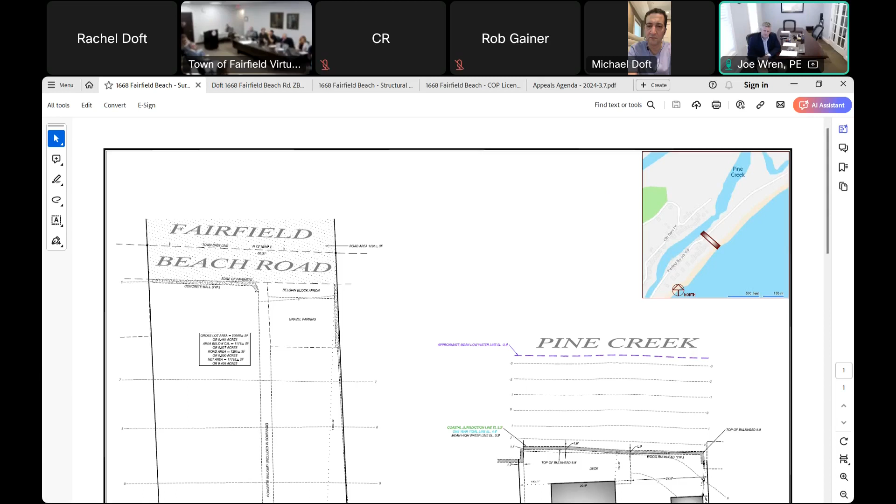Excellent. So this is the survey map that was prepared. Up in the upper right corner there's a location map. Everyone's familiar with Fairfield Beach Road and Pine Creek, this location is here. Similar to other properties on Fairfield Beach Road, there's the main house on the Long Island Sound side, which is number 1671. Nothing is being proposed or done on that side at all. On the opposite, north side of the road, house number 1668 is at this location. There's currently a deck and steps at the front, a gravel driveway, a small shed in this corner, an existing deck here with steps, and then a bulkhead similar to all the other properties along Pine Creek.

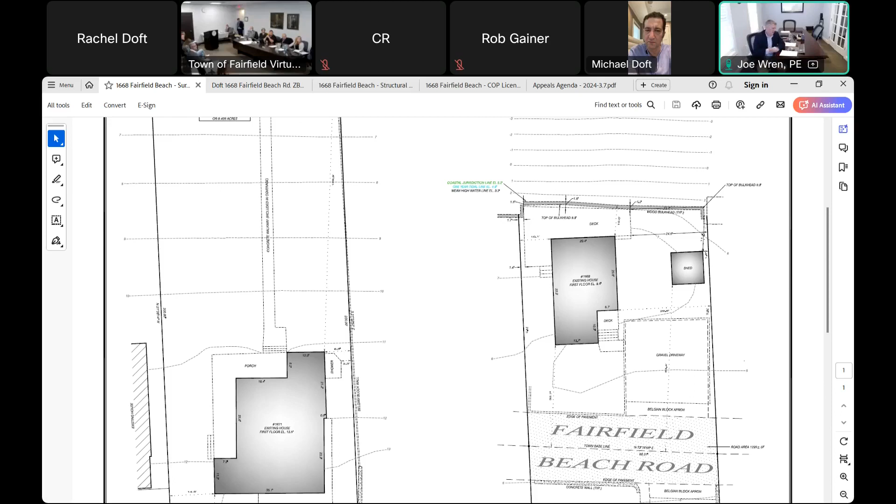In a nutshell, what we're proposing to do is to repair this bulkhead, and I'll show you photos momentarily. Currently, there is soil behind that bulkhead being lost through the deteriorating bulkhead, causing structural failure of this deck. We included pictures with the application, and I'll bring those up momentarily.

All the applicant is proposing to do is remove this deck, because they have to. In order to repair the bulkhead, they have to excavate behind it to replace the timbers. I'll show you those plans as well, and then rebuild the deck back to its existing dimensions, no differently. The steps, all the dimensions of the deck, step on the right side and a few steps on the left side, all of that will be put back.

So we're not technically increasing anything. Since we're removing this to repair it, we kind of have to treat it as a new structure, unfortunately. The structure was there for decades.

No one knows the exact date. We went back in some aerial photographs, which we included. The furthest we can go back with a clear image was 2006, which is now 18 years ago. But Rachel and her brother have recollection of the deck being there back to the 1970s when they were children, and remember being on the deck, but we just don't have any photographs of that. Regardless, it's been there for decades, and it's in existing non-conforming condition.

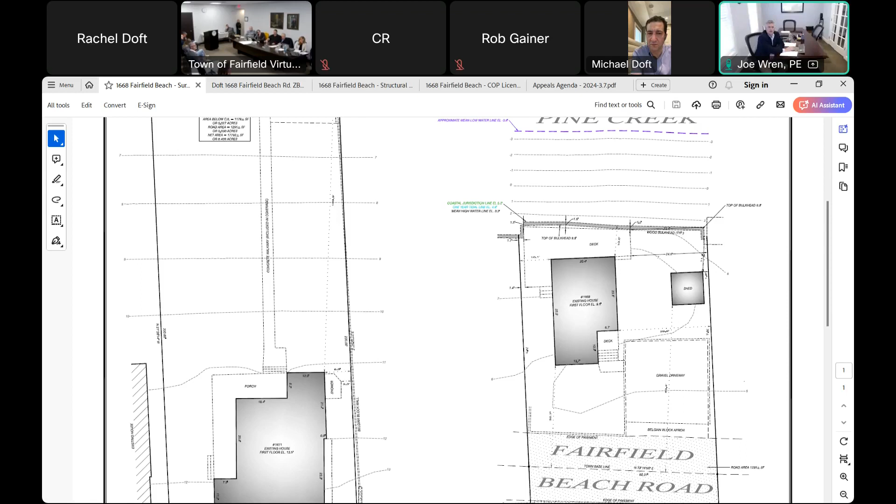With that, I would like to bounce to the application itself, where we provided the summaries and the narratives. Before I get into those, I would like to scroll down and get into the site photographs.

So starting with this photograph, I can rotate this too. This is 2006, October 2006, and you can see the house and you can clearly see the deck with the railings. Next photograph is from 2012 that we had - again, you can see the house with the existing deck and railings. 2022, same thing, not much change otherwise, very similar deck.

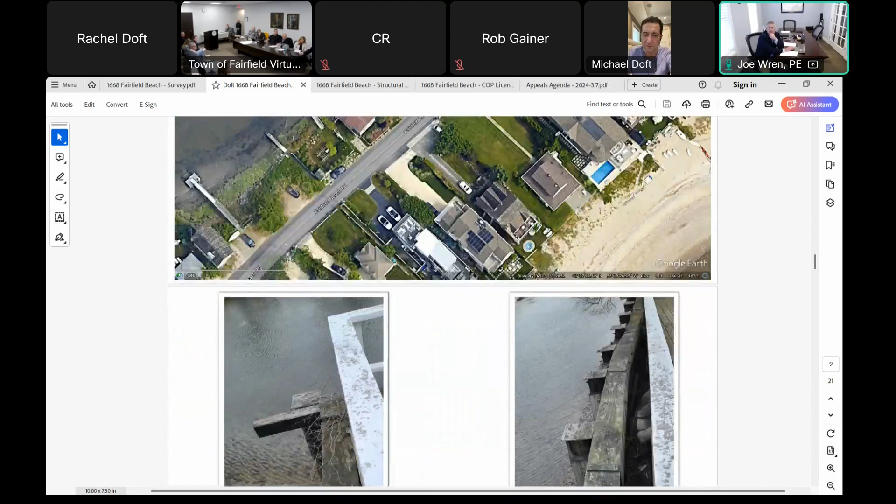These next photographs are of the existing bulkhead. This first photograph is essentially the northwest corner, how it ties into the adjacent property. This next picture on the right is a lateral picture along the seawall, and you can see there is some bowing. You can see the existing pilings that need to be straightened as well.

But the biggest issue is down low, at the mud line. You can see all this deterioration here. In many areas, it's perforated through, and there's significant loss of soil from the other side of the bulkhead, causing the failure of the deck.

This photo is the current deck as it is, and you can see the large sag in the center. It hasn't quite fallen in yet, but you can see the structure is being undermined. The soil support is being lost, and it's getting to the point where it's unsafe to use and needs to be rebuilt. But of course, you wouldn't rebuild the deck without fixing the substructure, because the same problem would occur very soon thereafter.

Some of these other photos just show different angles of the seawall. We're proposing to leave the piles in place. We had a structural engineer evaluate the whole situation - the piles will stay in place. However, they will be jacketed with plastic PVC jackets, and then grouted in between to extend and prolong their life.

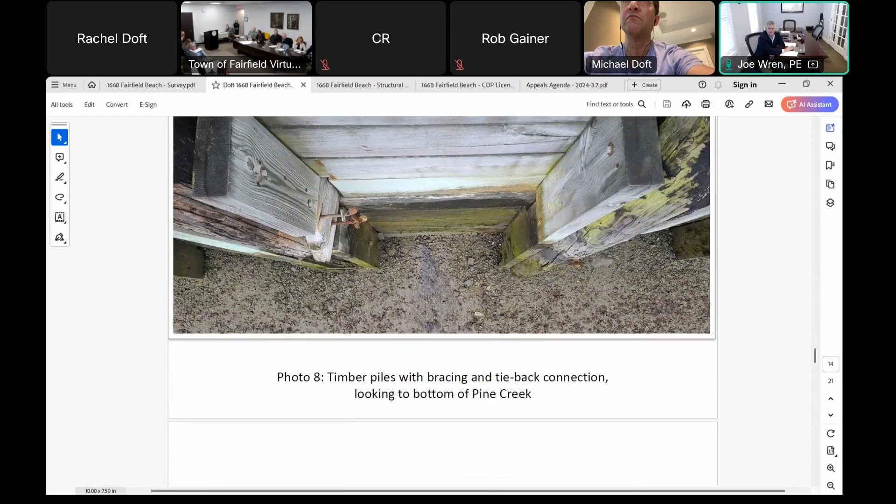We did apply for a certificate of permission with the Department of Energy and Environmental Protection. We did receive that, and I have a copy to show you as well. In December 2023, we got a certificate of permission, or license, from DEEP to do the work to the bulkhead as described.

This angle of the deck, again, is from the northeast side looking toward the northwest. Here's Pine Creek, and you can clearly see the sagging of the deck there. These are just all of the abutters.

With that, I want to go back to the beginning of the application. We have our summaries here and the variance requests and so forth, written here. I would just like to quickly read these in and paraphrase where I can. They are both very short.

The answer to number 10, this was the narrative: the purpose of our project is to replace the existing deck between the existing house and the existing bulkhead along Pine Creek, in kind, approximately 400 square feet plus the steps to grade. The existing deck has failed structurally—see photos—due to the deterioration of the timber bulkhead along the tidal creek. The lower timber lagging along the bulkhead has deteriorated to a point that soil from beneath the deck is migrating with tidal fluctuations to Pine Creek, thereby diminishing the soil support of the deck foundation.

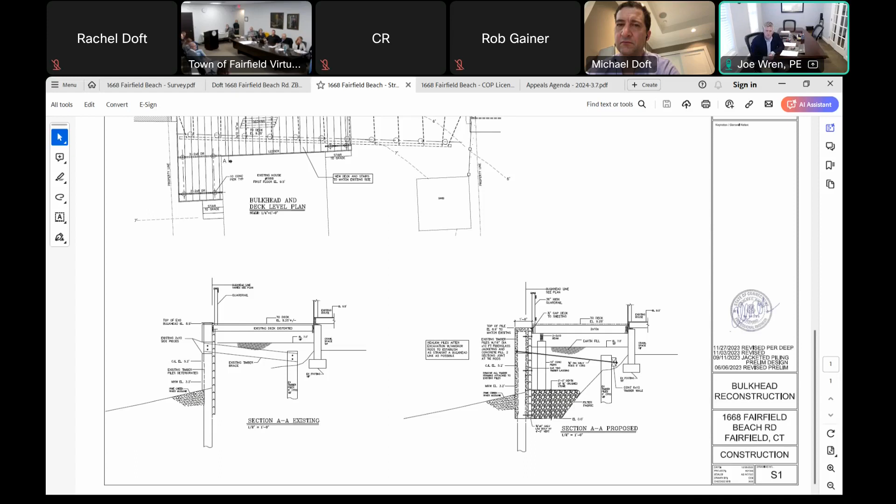And the wood decking surface. This plan was prepared by a licensed structural engineer. We are replacing the soil underneath with some more well-draining soil, some crushed stone down below, and then some sandier material up above as earth fill, just to promote drainage and work against future deterioration of the lagging as well.

Next, as long as you can continue to see my screen, I just wanted to show you this is the actual official license from DEEP for this work, reconstruction of a seawall for flood and erosion control. This was just from last December. After this was submitted, we talked to zoning, which was very helpful and got us to this point. We submitted the ZBA application, and that is why we are here in front of you today, so they can move forward hopefully with this work in the near future.

That is everything that I have, I believe. If Rachel or Michael wanted to add anything, now would be a good time, and then we could open it up for any questions.

Sure, thanks Joe. I hope everyone can see me again, I apologize if for some reason that's not working. I just wanted to reiterate and emphasize just what you had already said, which is all we're trying to do here is restore something that's been in place for as long as I can remember, not adding anything to it, just trying to keep the property functioning. So I think other than that, you've said everything.

And Michael, if there's anything you want to add, go ahead. Thanks, okay. I don't know if anyone can hear me yet.

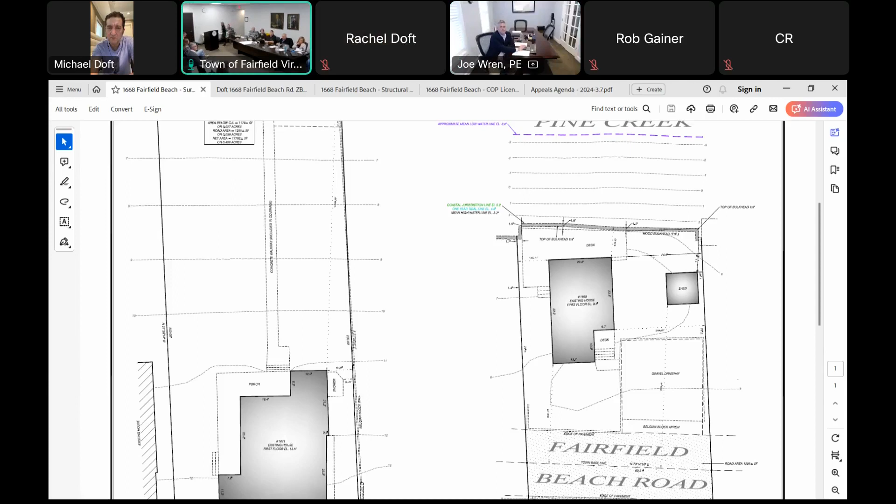Okay, thank you. Any other questions from the board? None, seeing none. Is there anybody in the room or online who wishes to speak in favor of this application? Anyone in the room or online wish to speak in opposition to this application? Hearing none, seeing none.

On to number 5, 9 Ludlow Court, map 180, parcel 327, petition of Megan Adesi Miele and Joseph Miele for a variance of the zoning regulations, section 5.2.4, to reduce the sum of 2 sideline setbacks from 25 feet, currently 22.9 feet, proposing 22.9 feet, for permission to construct a second floor addition. Premises is A zone.

Good afternoon, Chairman and Board. I'm Megan Miele, my husband Joe was outside. We're here to seek a variance for our home to reduce the sum of two sideline setbacks from 25 to 22.9, which it currently is, so that we can construct a second story addition over our pre-existing home. The hardships of our property are that it's non-conforming, was built in 1936, and the property is very long and thin, and primarily built on ledge, rock, and boulders. So we're trying to keep that as we expand.